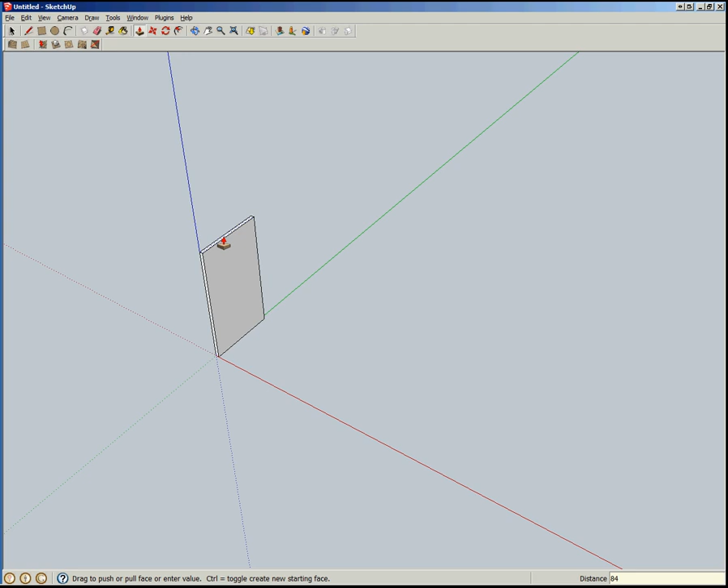I start with creating the stock for the sides, and I do a cross-section of the stock. Create a rectangle with R, and I'm going to say 3/4 by 15 inches. That's going to show me the cross section of the stock. I'm going to pull this out to say 84 inches, or 7 feet tall. As soon as I have a single unit, I'm going to hit spacebar, triple click, G to create a component, and I'm going to call that the side.

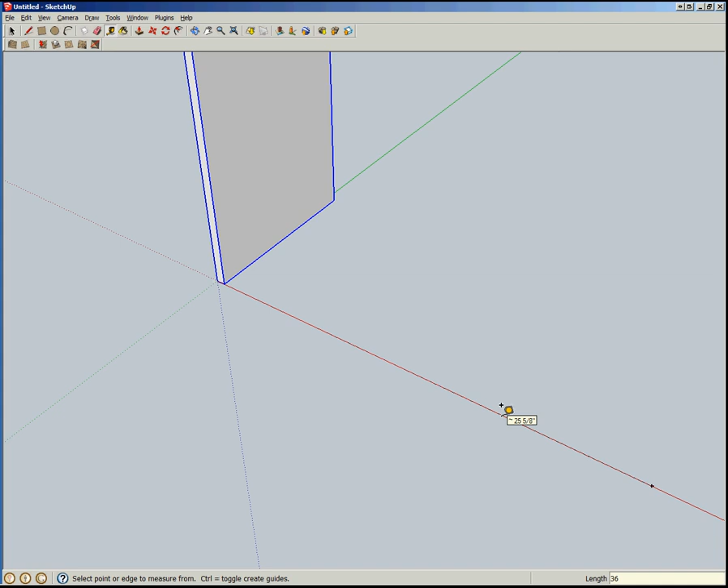Now I'm going to create a guide point. It is 36 inches out, and I am going to pull a copy 36 inches out. Remember, that's the move tool, hitting control to do the copy. Now once I pull that out, you do want to flip this side in a mirror reflection this direction. I pulled in the red direction, so we know that this is the red direction, and we want to flip along that red direction. Now it doesn't look like we did anything, but what we did was reverse these two sides.

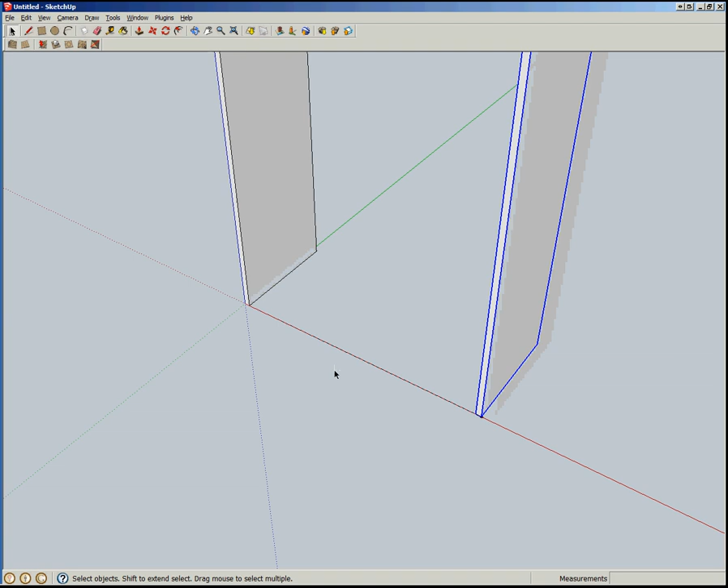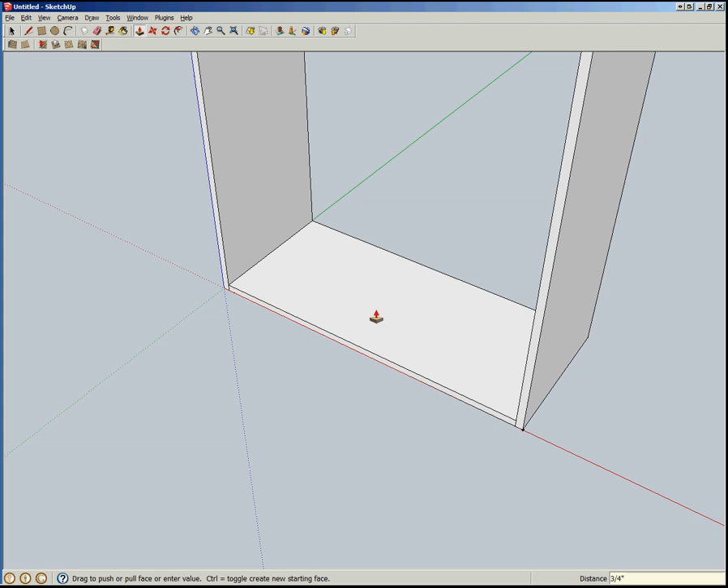Okay, so now we want to create our first shelf. Again, R for rectangle. Here I'm going to be creating the face rather than the cross section of this board, it's simpler for this geometry. So there's the face of the board. I'm going to pull that up to say 3/4 thick. Again, you immediately treat it like one unit, that's a shelf. So I triple click, hit G for make component, shelf. Again, making sure that we have replace selection with component checked.

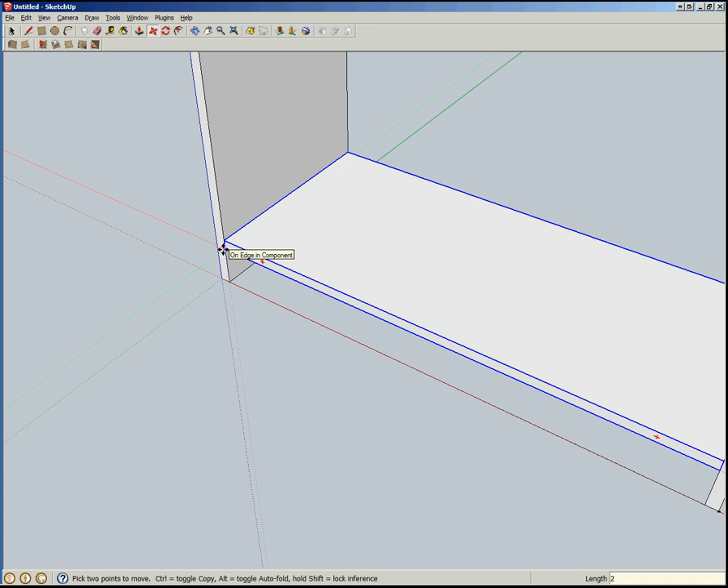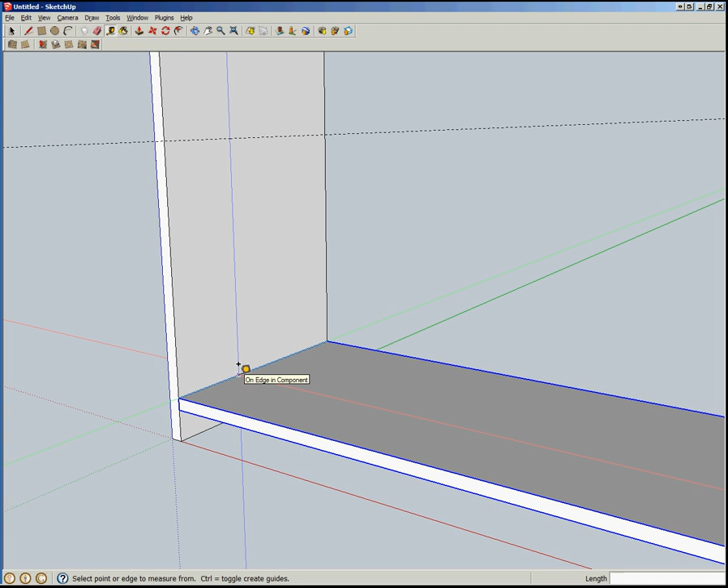We don't want this sitting on the ground, so we want to move it upwards 2 inches. Alright, now what we really want to do is create a shelf that is of a certain height. So I'm going to grab the edge here and go upward, type 15 inches. That's going to put this guide point at 15 inches. Now that is 15 inches between the top of this shelf and what we want to be the bottom of the shelf above it, so that we can fit a 15-inch book in there.

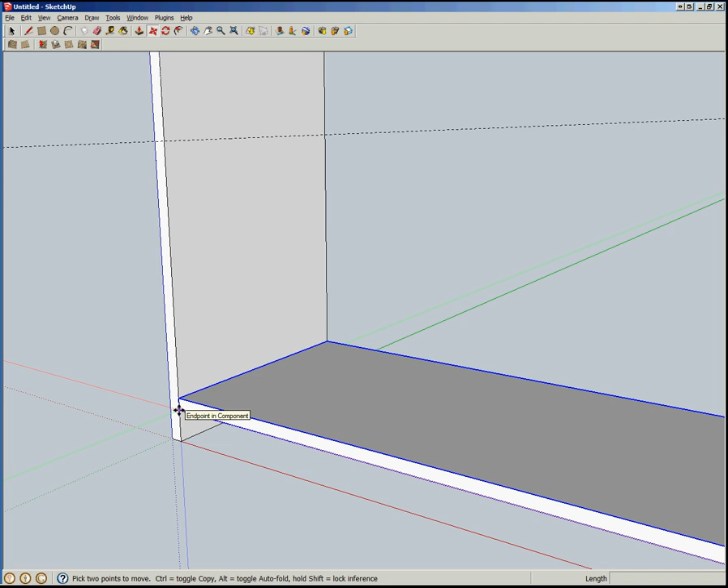So I'm going to select the move tool and use it to copy this shelf upward. I'm going to pick an endpoint that is on this board somewhere, and that is on the bottom face of that shelf, so I can align it with the guideline that I just created. So click that, hit control, move upward. As soon as I have the intersection, that inference, I can go ahead and click again, and then I've created a shelf that's 15 inches taller above the previous one. Select that guide line and delete it.

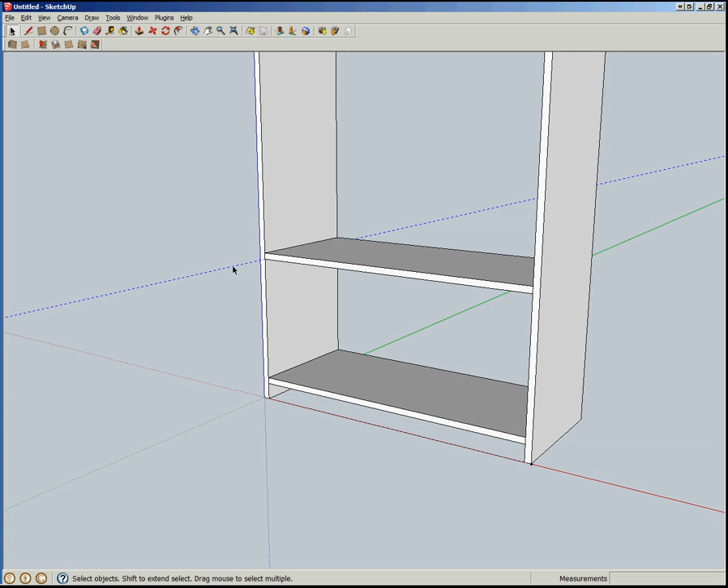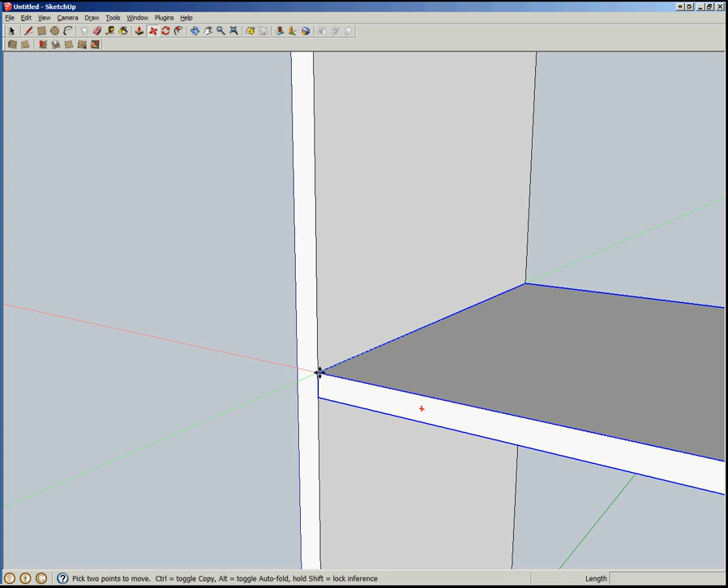Now we want to distribute the rest of the shelves evenly, so I'm going to select this. I'm going to grab an endpoint which is on this vertical line and is on the top of the shelf, because I want to match it up with the top of the sides. So M for move, there's the endpoint. I'm going to start moving upward, tap control. I need to zoom out for a minute so that I can zoom back in up here. And click, that's all it takes.

At this point we want to divide the space up evenly, so I haven't done anything except scroll out, and I can type /3 - no, that's too big - /4, /5. Yeah, 5 looks good, we can certainly work with that.

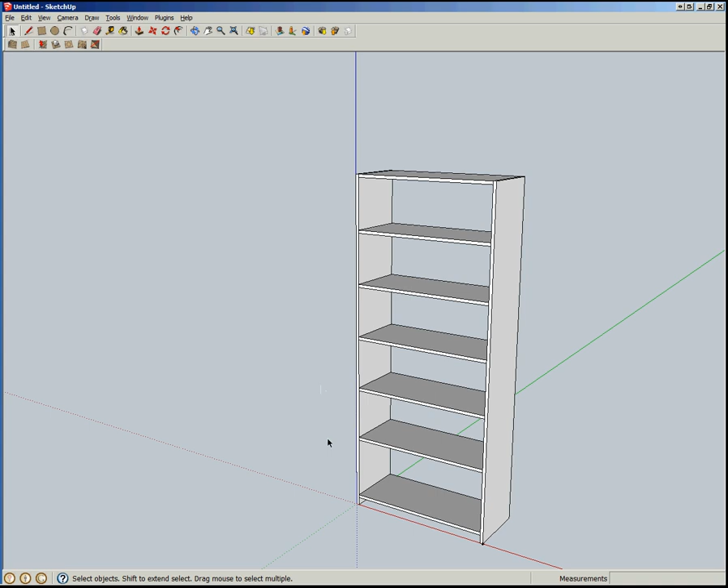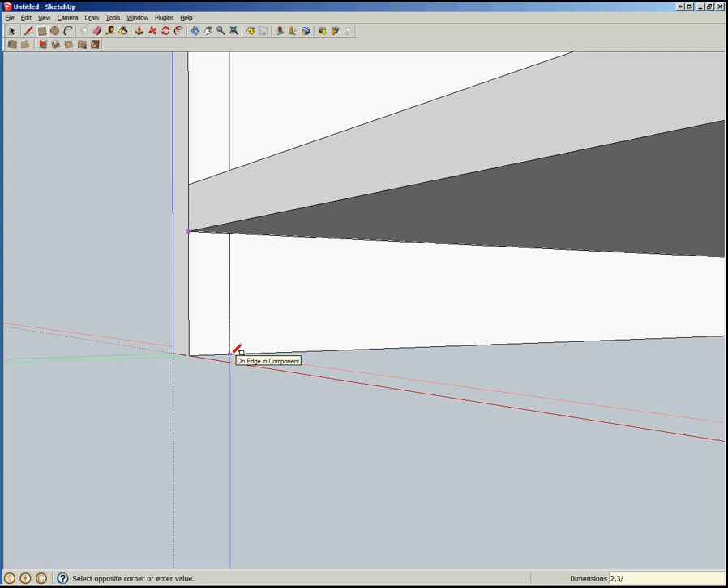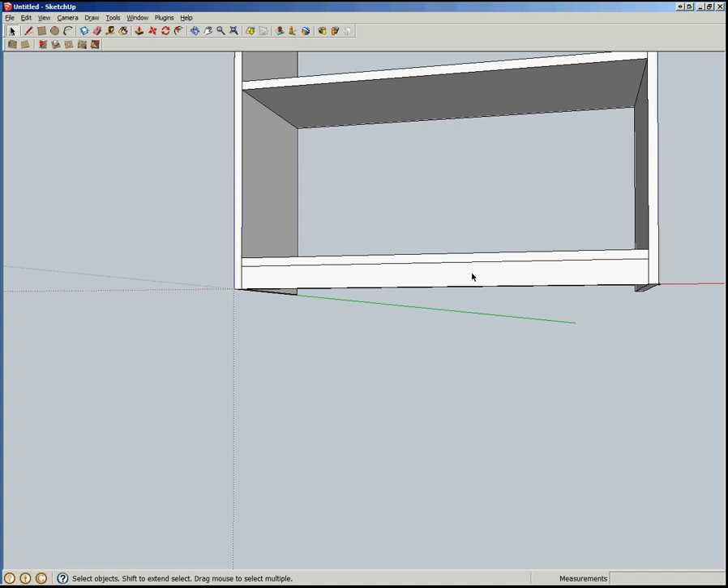Alright, so let's do a toe kick on this one. I'm just navigating around here. For the toe kick, I like to do the cross section of stock, so that's 2 inches by 3/4 inches, and I just created that face. So I'm going to scroll out for a moment. I'm going to pull this face till it's even with the front, the inside of the sides. I now have a unit. First thing I'm going to do, triple click, G, toe kick.

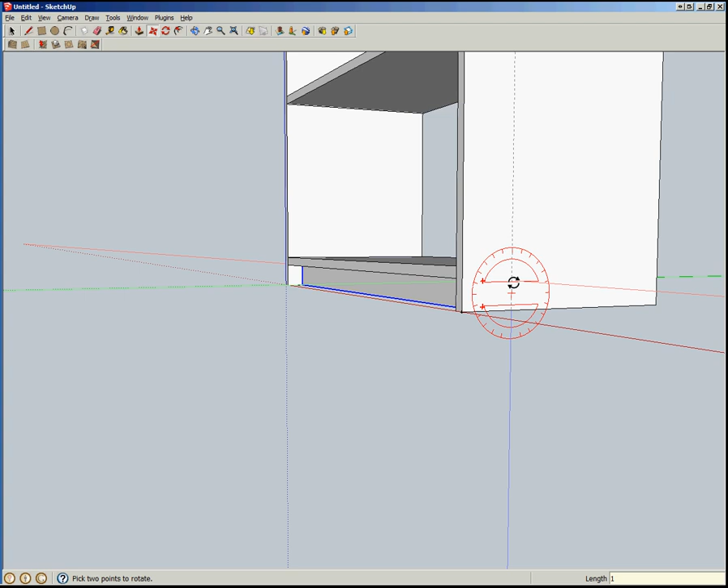Now we don't want the toe kick all the way forward, so let's move it backwards just a little bit. I'm going to click an edge, make sure I get my axis - okay, green axis. Hold down shift, it becomes bold, it locks the inference, move in that direction. I don't care how far because I'm going to just type in a number, say 2 inches. 2 inches is probably too far in. Let's go 1.5 - even that's pretty far in. Yeah, 1 inch is best. Alright, so there we have our toe kick. I'm going to rotate it around.

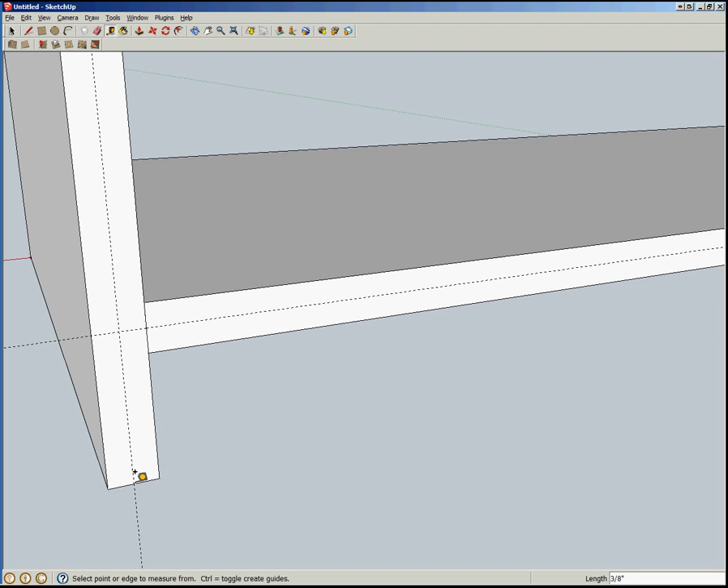I'm going to do a back panel. T for tape measure. I want to go from the middle of this board and the middle of this board. So I'm going to go up 3/8, and in again 3/8. What I'm doing is snapping to midpoints here, right? So that's how it knows it's 3/8. Then I'm going to scroll out and scroll in up here. There's 3/8. Again, I'm always going from the edges here. 3/8. So now I have my construction lines.

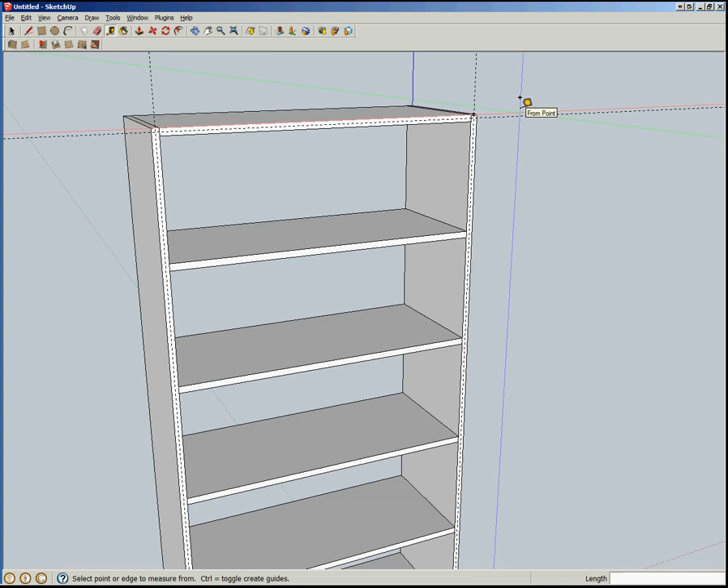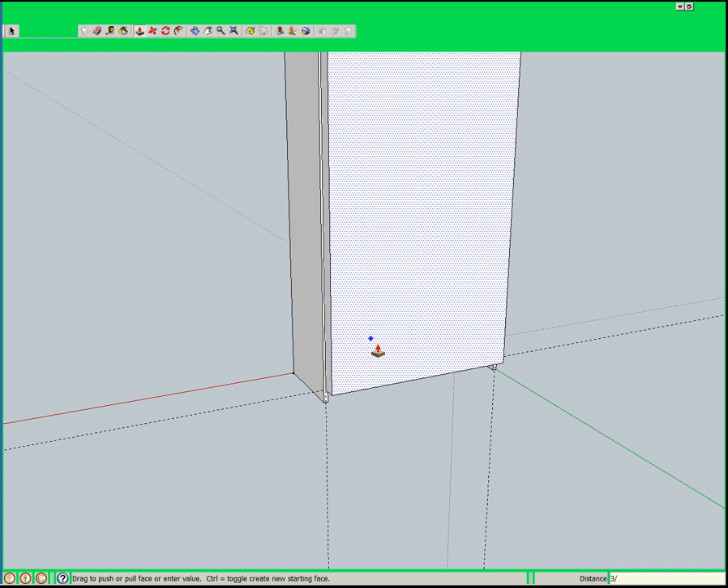I'm going to create one big face from this intersection. Scrolling out so I can scroll back in. Okay, there's one big face. I'm going to do - sorry about that green, I don't know what's going on there - I'm going to pull this out, say 3/16. Let's delete the guides, and that's it. There's our bookshelf. Thanks.